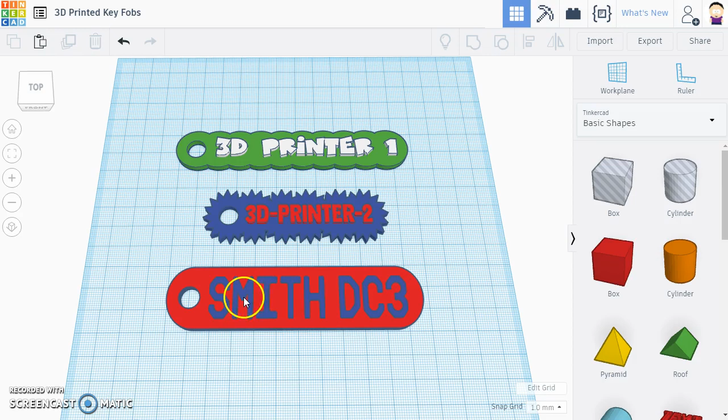So here's my examples. In this first video I'm going to make 3D printer 1, then in part 2, 3D printer 2, and you've guessed it, in part 3 I will make the Smith DC3 key fob as well. So just now I'm going to move these off to the side.

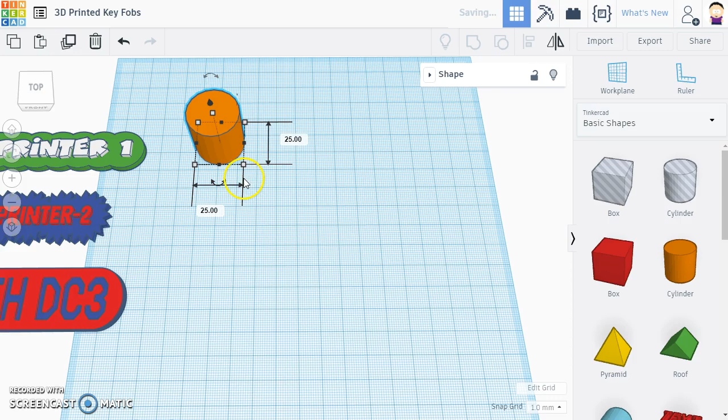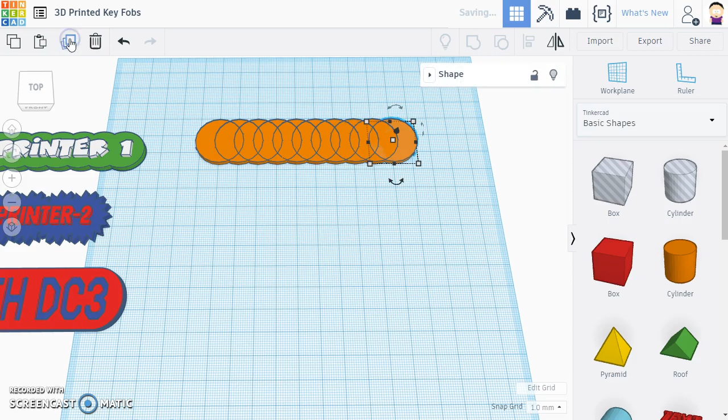Holding down the shift key so that when I expand it out it's going to scale it on the X and Y, and then I only want it to be 2mm thick, and from here I'm going to hit duplicate, and then shifting the arrow key once will move it 10mm, and then I'm just going to keep on hitting duplicate now, and I should get a nice little pattern which I can then select all and group.

And if I want my colour, go in here and make it green, and hide that away again. And the next thing I have to do is to import an SVG of the text which I created earlier on. If you're not sure how to do that, please look at the video which shows you how to convert a font into an SVG which you can use in Tinkercad.

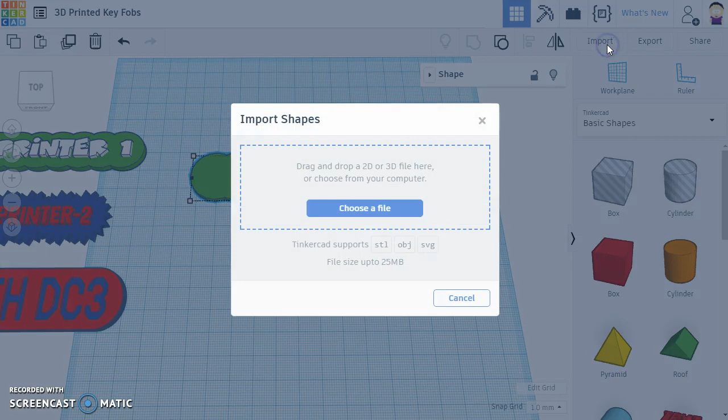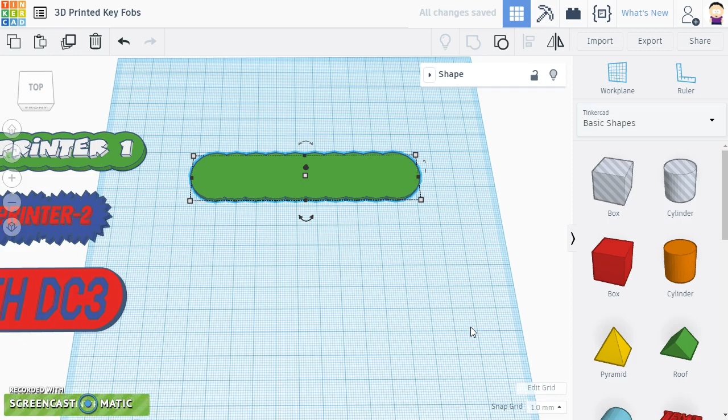So I'm going to hit import, choose file, and then here is my SVG version of this picture. So right now it's way too big. I'm going to actually say that I want it to be 100, and it should automatically adjust the length there. So I'm going to import, and then I'm going to make my text white.

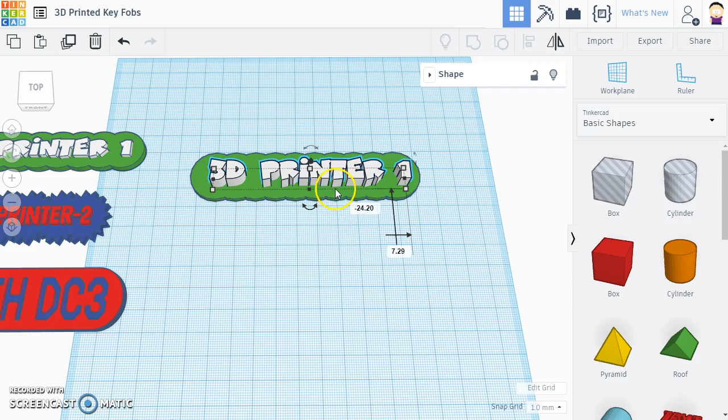And at this point a lot of students just drag this over here and then they think that's fine. I'm going to show you why it's important if we're going to print in two colours that we work a little differently. First up, I'm going to make my hole first of all. Well, let's make this a little bit larger.

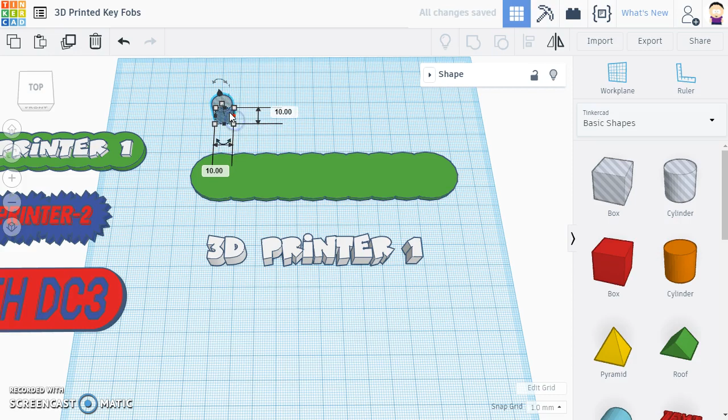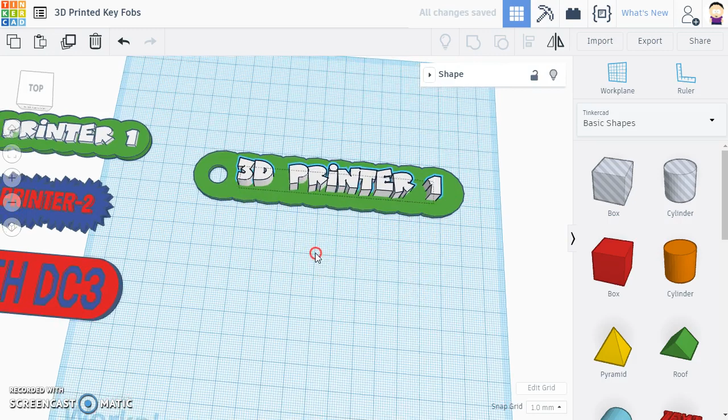Okay, so got a cylinder. Go for 10 by 10, holding down the shift key. And I can drag this down here, and then use the align tool to match it properly. And then I can just group these together. And then, just to show you how I would do this, I'm going to move this across. So that looks about right, maybe a few taps to the right.

Okay. And if I moved the text down, yeah, that looks kind of fine. But if I use the hide option here, you're going to see that that text goes all the way to the bottom. So if I was to print that on the Ultimaker 3 with two colours, I would end up having a lot of wasted white filament in that kind of green block.

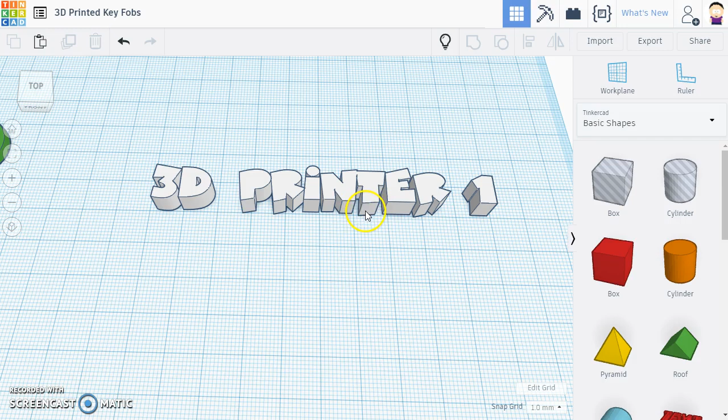Okay, so to make your print process quicker and more effective with your use of your filament, what I'm going to do is I'm going to get the work plane tool. I'm going to click on the surface of my green key fob, and then I'm going to click on my text, and I'm going to press D, which is going to drop this onto the work plane. In this case it's going to move it up so it's sitting perfectly on top.

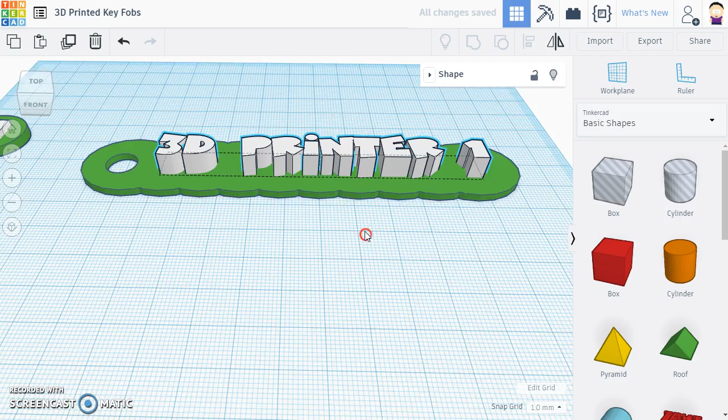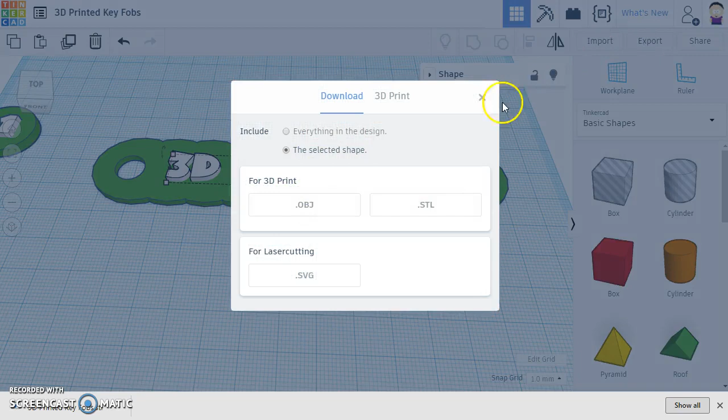I'm going to deselect that, and then from here I'm going to set my text height to 2mm. Okay, so then when I print this I can export green background as an STL, and then separately light writing as another STL, which I can then put together in Cura, which I will show you in another video.